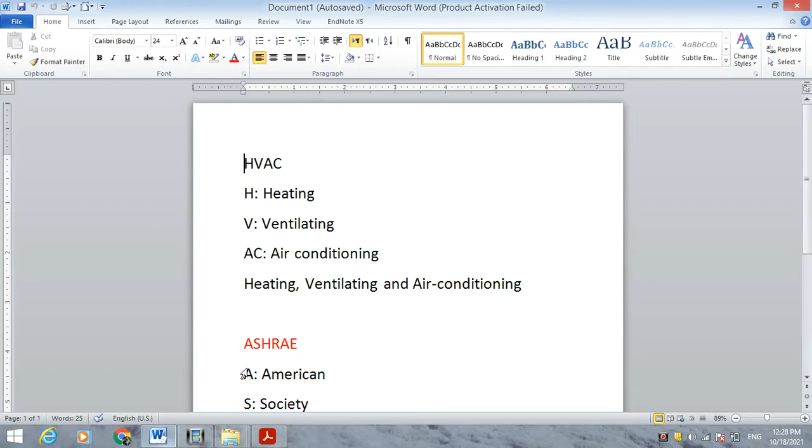Moreover, the textbooks for this science are issued by ASHRAE. ASHRAE is a very important source for the science of HVAC. Actually, it can be the standard for this type of science. ASHRAE stands for American Society for Heating, Refrigeration, and Air Conditioning Engineers.

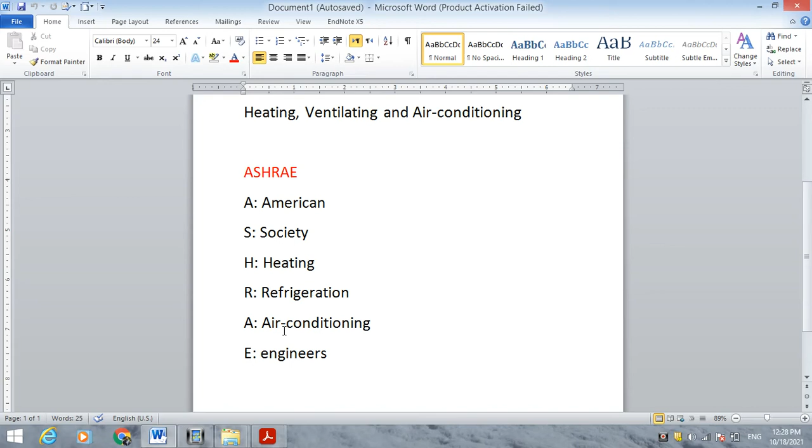The textbook we are going to consider for this study is Principles of Heating, Ventilating, and Air Conditioning, 7th edition, by William Coad and Harry Sauer, Ronald Howell, issued by ASHRAE.

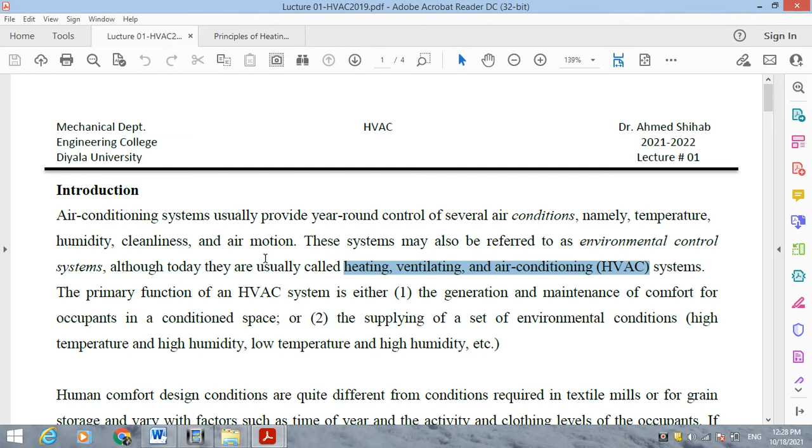This first lecture, as I mentioned earlier, will be the definition and introduction for HVAC. First of all, control is the main thing you have to know about. So we need to control air, to control temperature, to control humidity. So we need to study it to know about the air.

We all know that air consists of several gases such as nitrogen, oxygen, carbon monoxide, carbon dioxide, and so on. However, there is another part that can be added to the air components. It's called water vapor. Water vapor is one of the air portions.

Someone may be wondering what the source of this water vapor is. In fact, the major source for water vapor is the human itself. In breathing, we discharge a lot of water vapor with the air. Moreover, trees and plants are another source for water vapor. Seas and rivers and all other types of water gathering could be a source for water vapor.

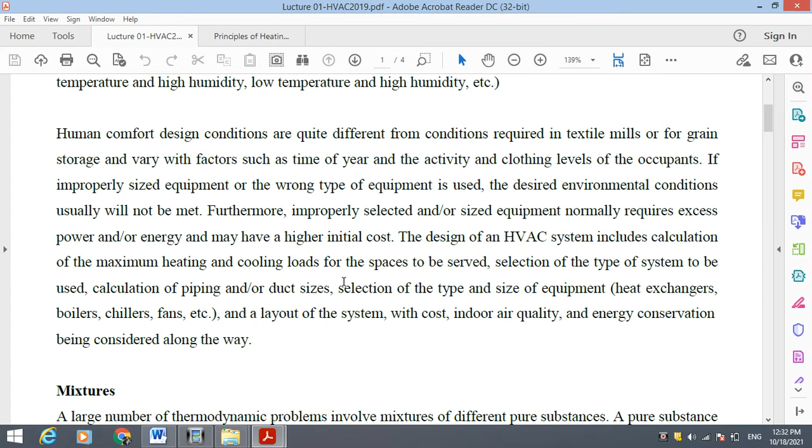Therefore, this is the first step in our study to know about air conditioning, which is learning about moist air. Now we agreed that air consists of dry air, which includes oxygen, nitrogen, carbon dioxide, carbon monoxide, and so on, and including water vapor.

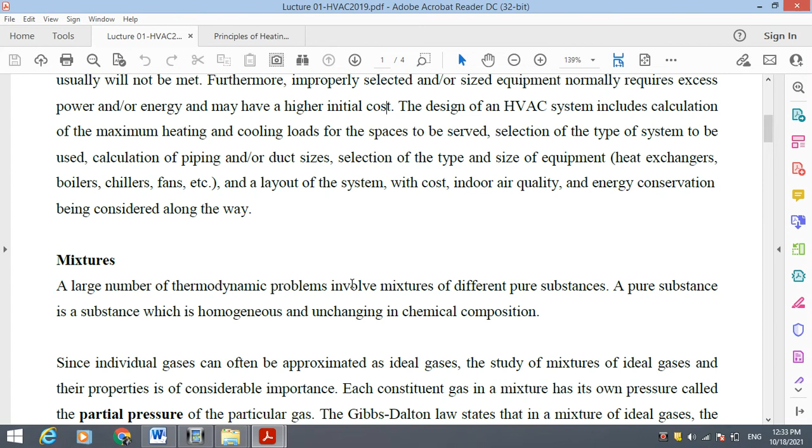Mixing of water vapor and dry air is called moist air. The term mixture refers to a large number of thermodynamic problems involving mixtures of different pure substances. A pure substance is one that is homogeneous and unchanging in chemical composition.

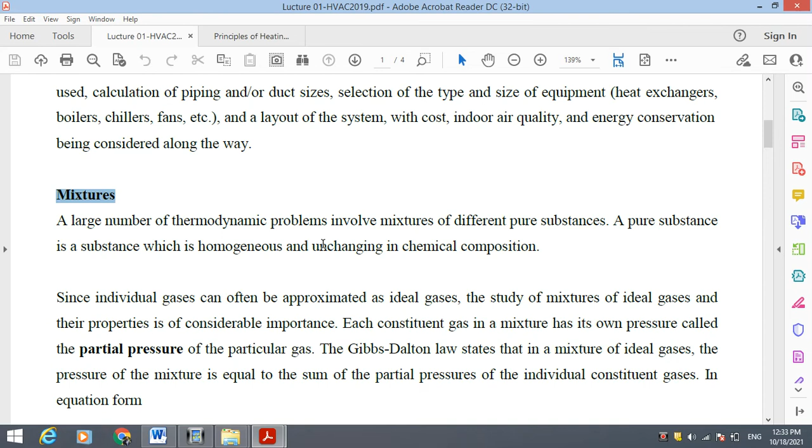Since individual gases can often be approximated as ideal gases, the study of mixtures of ideal gases and their properties is of considerable importance.

Each constituent gas in a mixture has its own pressure, called the partial pressure. I will explain it in detail and in a direct way.

The summary of the Gibbs-Dalton law says the pressure of a mixture of gases or fluids equals the summation of them. The pressure of the mixture equals the summation. In other words, the pressure of atmosphere equals the pressure of dry air plus the pressure of water vapor.

For example, the atmospheric pressure at sea level is about 101.325 kilopascal, or sometimes we just say it's 1 bar or 100 kilopascal. So the pressure approximately is 1 or 1.5 kilopascal for water vapor pressure, and the rest is for the dry air, about 98 or 99, depending on the summation, which will total 100 kilopascal.

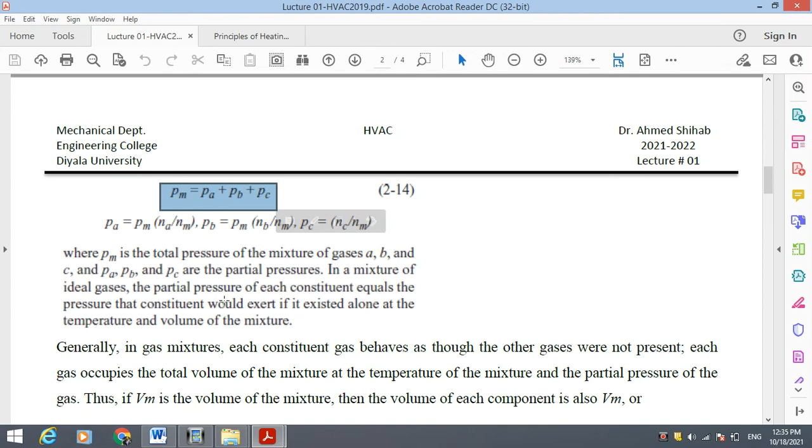However, the volume is constant, which means if we consider a space of about 70 cubic meters, the water vapor inside this space will have a volume of 70 cubic meters, and the dry air volume inside this space will also be 70 cubic meters. I hope this is clear for you.

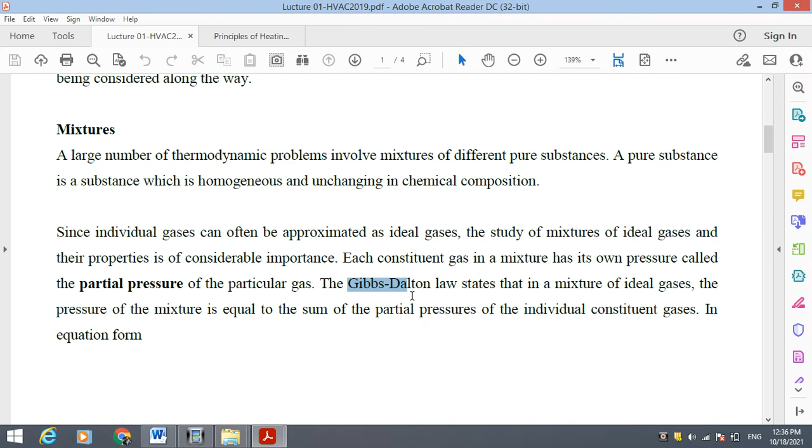This is the main principle of the partial pressure law, or Gibbs-Dalton law, and you should be familiar with this law. I think it's covered in the second stage of the thermodynamics course. These are the principles of it. Use Gibbs-Dalton and understand it. If anyone didn't understand what I said, I can repeat it with pleasure.

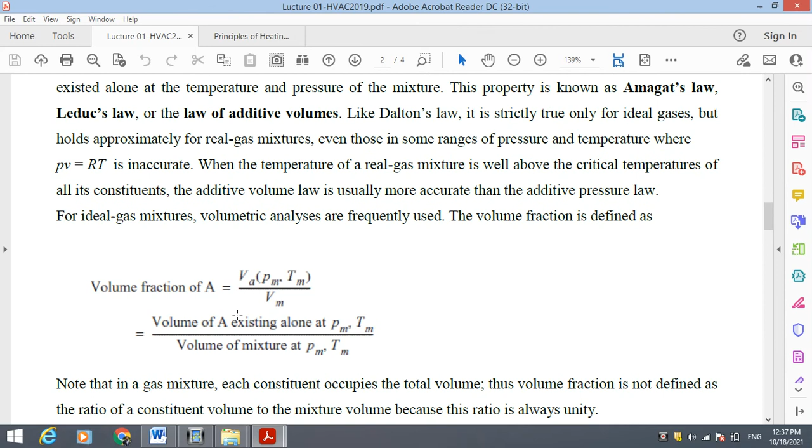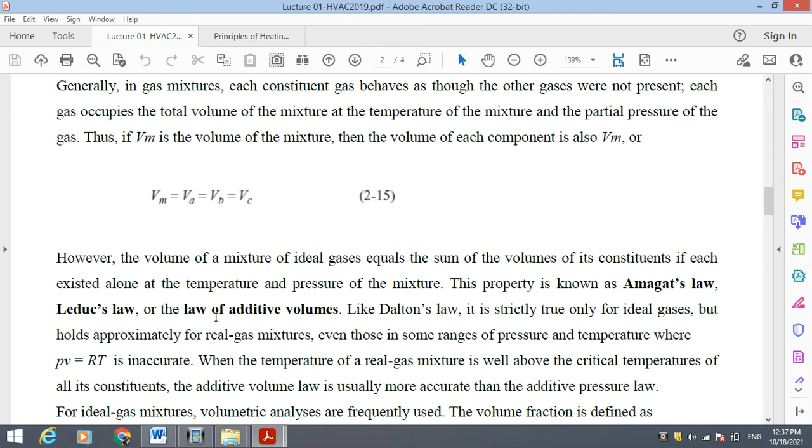Another law is Amagat's law for gas mixtures. However, the volume is additive, which means PM equals PA equals PB equals PC, but VM equals VA plus VB plus VC. In fact, we will not consider this law in our study. Through the next lectures, we will consider the Dalton law about the partial pressure relationship per mixture.

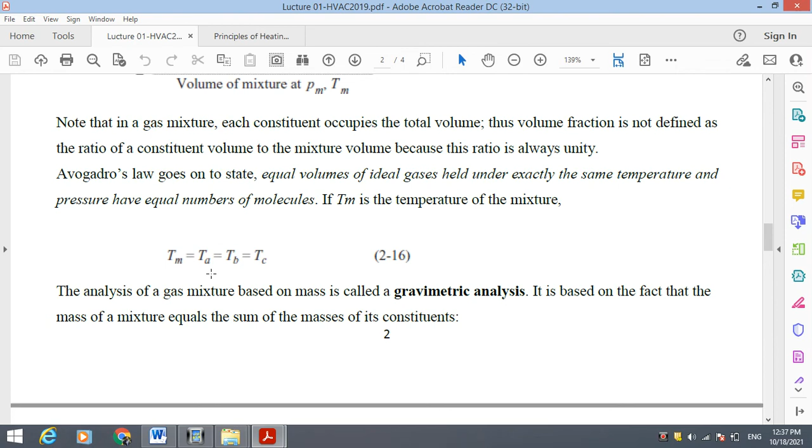More often, the temperature of the mixture equals the temperature of A, equals the temperature of B, equals the temperature of C. But the mass of the mixture, or total mass, equals the summation, which makes sense. The mass for the mixture equals the mass for dry air plus the mass for water vapor.

These concepts are very important to make you able to understand the next part of this lecture, which is psychrometrics, or moist air properties. I will stop here.

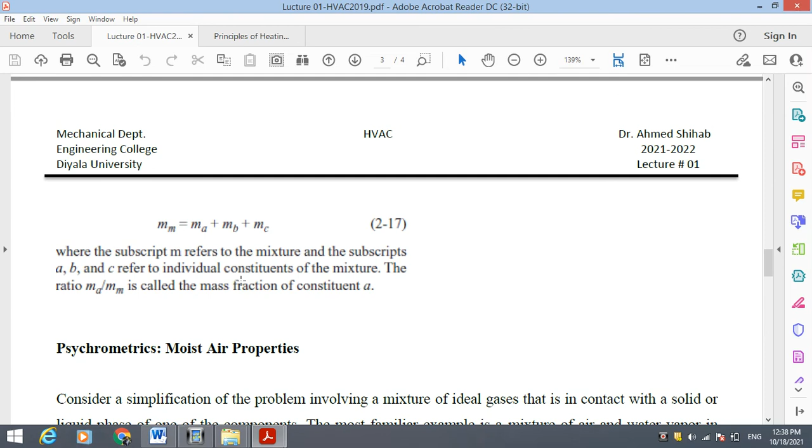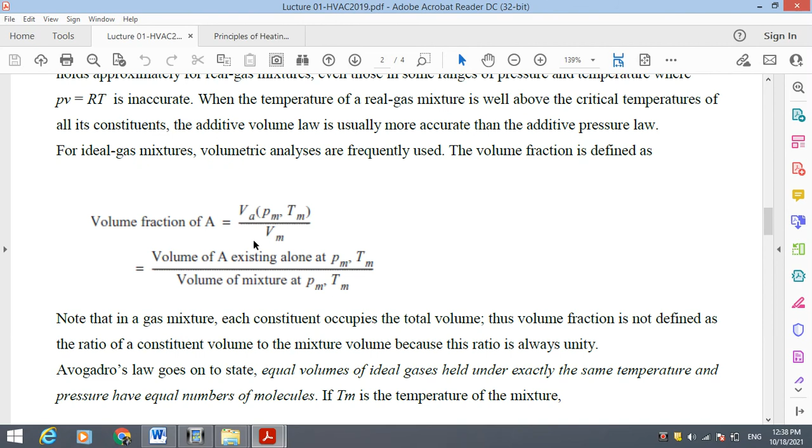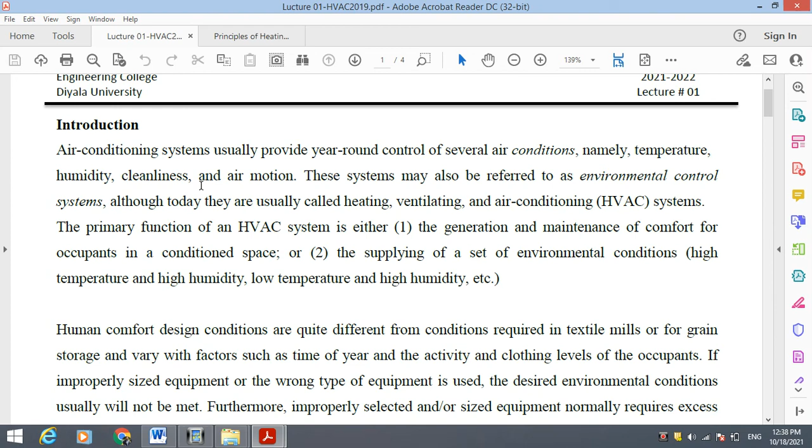Just as an introduction, I will repeat it. HVAC can be defined as systems that usually provide year-round control of several air conditions, namely temperature, humidity, cleanliness, and air motion. So to control something, you have to know about it, and moist air consists of dry air and water vapor. We know about the mixture rules of dry air and water vapor: total pressure equals summation, volume equals constant, temperature equals constant for each component, and mass for mixture equals summation, Ma plus Mb plus Mc.

I hope I gave you a good introduction, and the next lecture will be about moist air properties, what these properties are, and how to calculate them using several methods. I will explain several methods to calculate moist air properties.